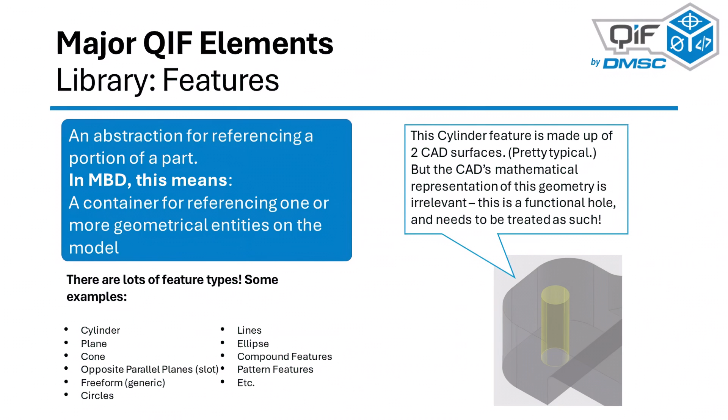And so to look at this example, it might be kind of hard to see here, but this cylinder here, maybe this is referenced by a size and a position tolerance. This cylinder is made up of two half-cylinder surfaces in the CAD. That's just an artifact of how it was designed. At the end of the day, there are not two half-cylinders on the part that you're making. You're making a hole. And so that's what's important.

What we're talking about is abstracting away some of the artifacts of how it might be modeled in CAD or how it might be represented in CAD. Because what we're talking about is a hole that needs to be controlled with the size and a position. So that's what we're talking about with feature, is sort of abstracting away the details of the specific way that the product or that the CAD is defined, and being able to speak in more abstract terms that are more relevant.

So types of features you might see, like a cylinder, that would be a hole or maybe a pin. Plane, cone, opposite parallel planes, like maybe a slot cut through a part. Freeform features, obviously, just sort of freeform surfaces. And then there are all kinds of 2D features as well, circles, lines, ellipse. You have compound features, pattern features, maybe what you might call a complex hole with a counterbore and a depth and a size and things like that. So we have all kinds of features to be able to capture all these types of entities.

And then characteristics. Again, this is a control that's placed on a feature. Maybe a size or form or orientation or location, tolerance control, dimensional control, surface finish, welds, whatever. And how are they connected? So again, characteristics don't point to the CAD directly. Characteristics will point to a feature, and then the feature is what points to the specific product definition, to the CAD, which is an important abstraction.

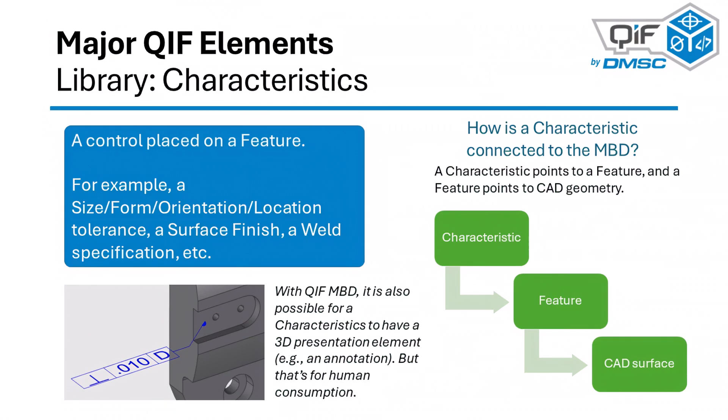And with QIF MBD, like in this image, we have an annotation, a 3D annotation that you can see with your eyes. That's rendered on the screen in a certain position, maybe in a certain presentation state. And that's actually part of QIF MBD, part of the product. But really, that's intended for human consumption. Strictly speaking, you don't need 3D annotations in order to have characteristics on your part. The characteristic is sort of the semantic, machine-readable description of what that control would be, and then separately you'd have the presentation element, which is meant for the human consumption.

Okay, so I just wanted to come back to this. I think it's a really key aspect of QIF that I just wanted to reinforce, the idea of features and characteristics. Okay, so from here we'll get into some more details. And I do want to reinforce one thing here, which is that we're really getting into some details here about QIF. So it's important to know if you're launching QIF across your whole company, nobody needs to know any of this.

All right, these are the details of QIF. That is really for nerds. And I know you all are a bunch of nerds, so I'll explain it. But this is not necessary to know. QIF is designed precisely to make it simple for the end user, that they don't need to worry about this stuff. You have a clean software implementation of this type of stuff, and it just works. Generally speaking, this is more for software engineers that are getting into implementing QIF. This is where you really want to know this stuff.

But for a lot of you, maybe you're end users, you're thinking about the enterprise architecture for how you're implementing QIF or something like that. Having this level of understanding could be helpful. So let's go ahead and dive into it. So I also had shown earlier in the QIF document that a couple of the elements are the datums and the DRFs.

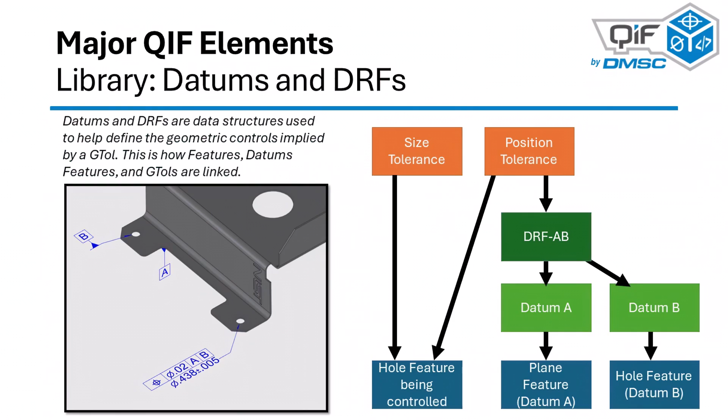So what does that mean? We have the position that also references the hole that we're controlling. And then we have the datum structure. So that position tolerance will also reference the datum structure, which is, we'll have a datum reference frame entity called DRF AB. DRF AB will reference datum A and then datum B, and then the datums reference these features. So not the geometry directly, they reference the features. This feature here and that feature on the bottom of the plane.

So actually it's pretty basic when you look at it. It's a pretty simple, pretty clean understanding of how datums work with geometric tolerancing.

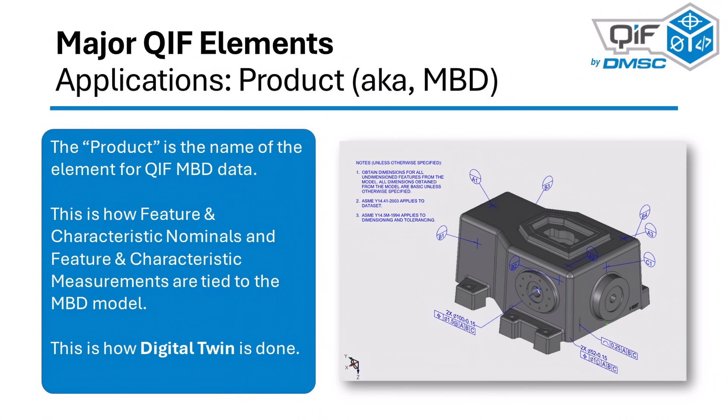The next major area is what's called the product. And so the product, generally speaking, especially in this audience, is the MBD. That's your CAD model and your PMI. There are other ways that you can store product data. It's actually possible to have a 2D drawing representation as your product. And obviously, in terms of current state, that's actually very common. And we have users that are very much doing QIF workflows with a drawing as their product.

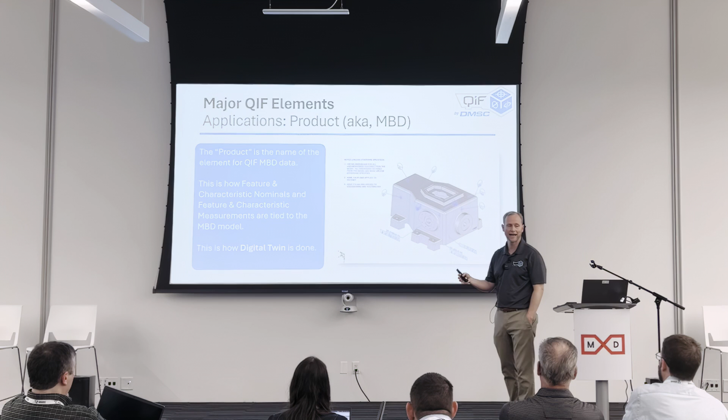But the future state, the state that we all want to get to, is using the MBD as the product. And so that's all of this. Our CAD model, the full CAD model, and the full description of the CAD model. All kinds of annotations, presentation states, so on and so forth.

And this is how features and characteristics, like I was talking about, and measurements, which I'll talk about later, which are the results, are attached to the model. Basically your features, at the end of the day, are the glue that exists between your underlying product data, this product definition, and your characteristics. The feature is sort of the glue that sticks those things together.

You hear about this term ballooning, which is an existing term. The term basically originates from you have a paper drawing, and you take a red pen and you start writing 1, 2, 3, 4 on all your annotations so that you can then transcribe that into a table, do your inspection, and write your results into the table. So there's this term ballooning. The idea is you have your drawing and you want to transcribe that into more of a tabular form of understanding exactly what there is to be measured.

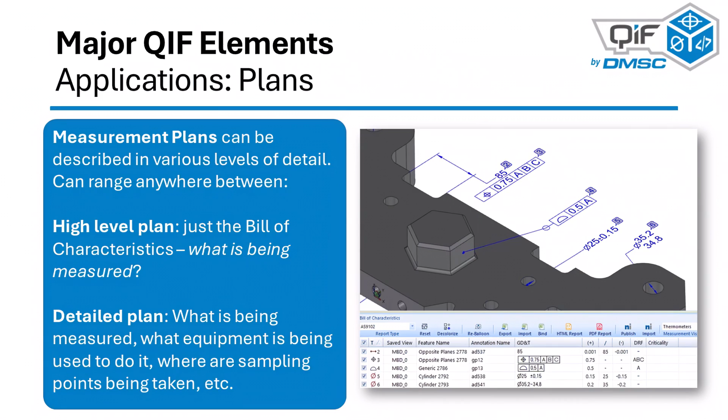So this fits very well with the idea of MBD, because now you don't have somebody interpreting a drawing and transcribing it onto a table, but instead all of this is semantically described in the form of PMI, features, and characteristics, and so you can very clearly understand exactly what needs to be measured.

And so that removes the idea of somebody having to manually do the work, but even more importantly, it means that when you have a QIF file, you get the same exact bill of characteristics every time because it's unambiguously described in the data format. It's not taking a complex drawing, giving it to 10 different engineers, and watching 10 completely different quality plans come back as the interpretation. That goes away. So it's a big deal.

And by the way, that's why you hear so much at this conference. I've been hearing it a lot. I heard it a lot at 3DCIC last month. This idea of characterization of a model, extracting basically this bill of characteristics out of the digital product definition. So that's our bill of characteristics. That's what we're talking about when we're talking about QIF Plans.

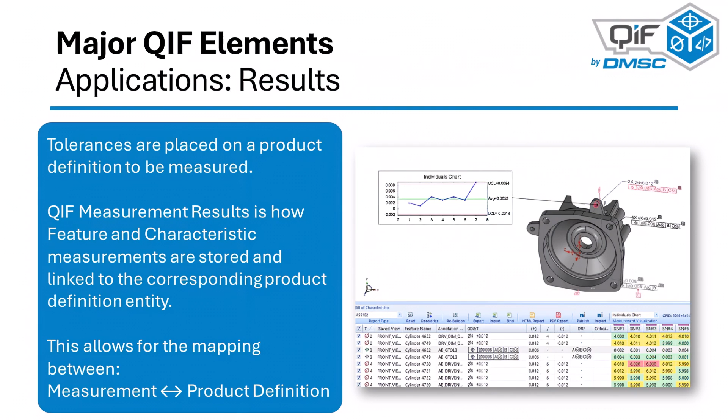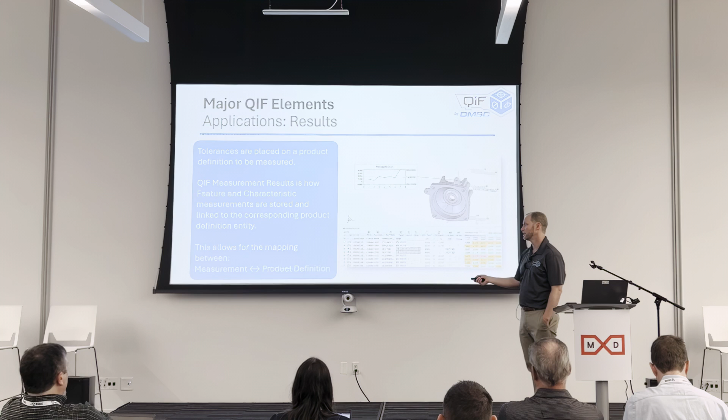So now we went off and we did some inspections, and hey, we have some results. It's pretty simple the way it works. We could just take these inspection results and attach them to the features and characteristics that we've already established. And since those features are attached to the MBD, we've established that entire chain of traceability. And so that's how we get the mapping between measurements that we're doing at the end of the line and our product definition that starts off right at the beginning.

Statistics. So the idea of statistics is that basically you'll bundle together a set of results to be able to carry out statistics. And generally, the idea that we've captured in these libraries is implementing classical statistical process control, which is sort of uniformly used in industry. And there are a couple different modes that it can be used.

One is simply to specify a statistical method that should be used. So you can think of it from a planning perspective, stating that this is the SPC approach that we're gonna use. These are the CPK limits that we're looking for, and so forth. And then the other mode is to actually capture the results of an SPC analysis that has been carried out. So this is what we're talking about with statistics. It's bundled very much with the results side of the world.

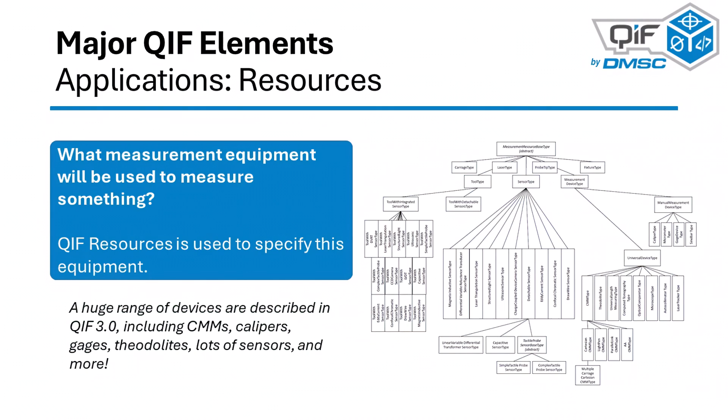Resources. So here, this is a diagram from QIF3. That's kind of a taxonomy of a lot of the different measurement resources, measurement devices, and so forth that are characterized semantically within QIF. It's quite rich, and actually there's been some significant improvements in the QIF4 area in terms of growing that out and really supporting a wide range of different types of inspection technologies.

Rules. So this is an interesting one to a lot of people. I think it's definitely pretty forward thinking. The idea is, let's say you want to establish some best practices or templates or corporate standards, however you want to think about it. But you don't just want to rely on the fact that our quality engineers are really good, so we're just going to let them decide what to do. You want to have some uniformity in your measurement. Even if it is true that your quality inspectors are really good, you still want to have some uniformity.

And so the general way that it works is it's an if-then statement. If some Boolean condition, then some action, or there's some decision or some rule that should be implemented. And the Boolean conditions that can be checked, it's almost infinitely flexible. But the simple ones: you could check for a tolerance type. Is this a profile tolerance, or is it a position tolerance, or is it a size tolerance, things like that.

So, in summary, I'll wrap up and we have a couple minutes for questions. I just wanted to bring this up again. Third time I repeat it, maybe everyone will remember it. Features and characteristics. This is really what it's about.

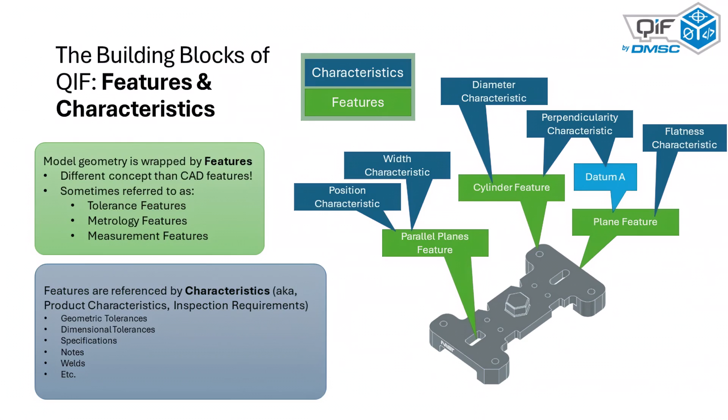And so my call to action would be, if you're not a member of the DMSC, talk with Mark Thomas and join. We'd love to have you, and we need more participants here in growing out the QIF standard and seeing how it can transform industry. So that's all I had. I think from here we'd open it up for questions.

Yes. Hang on. CT scan measurement technique, we use it for reverse engineering, and I'm not too familiar with, do they comply with QIF, like Volume Graphics? Are they involved, or just curious?

Yes, so in general, CT applications, when it comes to inspection, definitely fit within the QIF space. You could do dimensional inspections with CT, that definitely fits. And then there's also looking for defects, inclusions in the part and stuff like that, and that fits within the QIF workflow as well. In terms of the software companies that are out there in the CT space, I know a lot of them definitely are in the QIF space.